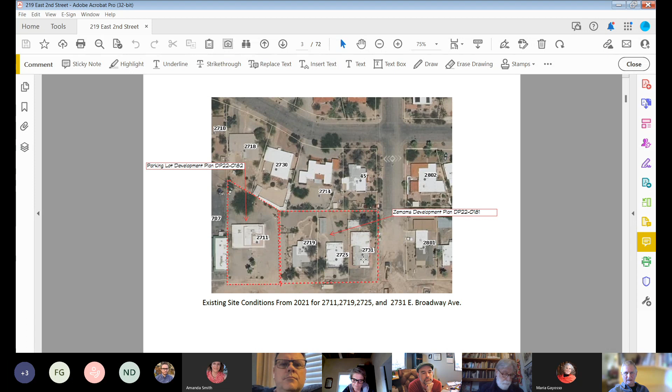We're well along beyond where this photograph represents. So the existing buildings on the property - excuse my scrolling if I zoom back and forth - this is the existing restaurant.

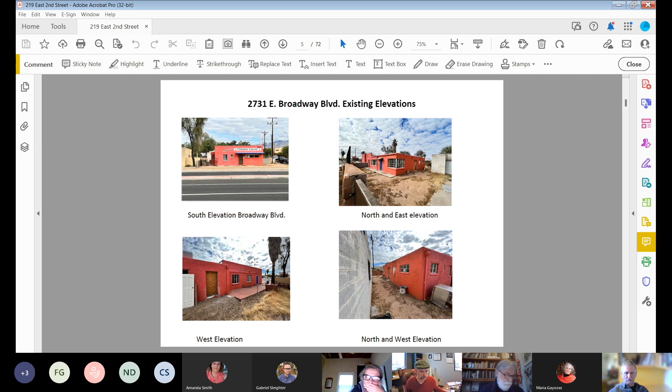Faven could talk to this if we need to, but the restaurant's been closed down for over a year, waiting for the improvements and going through the review process. These are the three elevations of the property as they were when I took the photos. This is one outbuilding in the back that is also being incorporated into the design as a covered outdoor eating space.

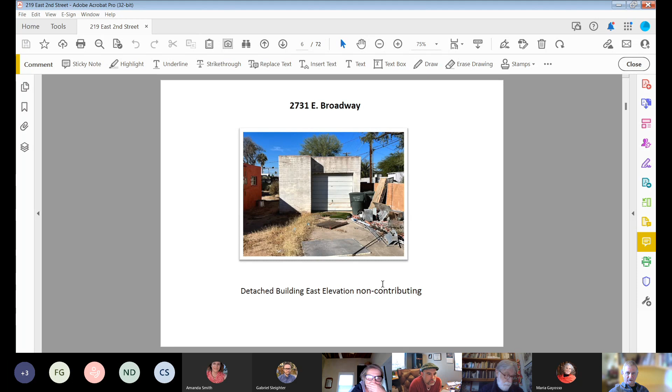This is 2725, which is next door, formerly an insurance company, and this again gives the three elevations of the building.

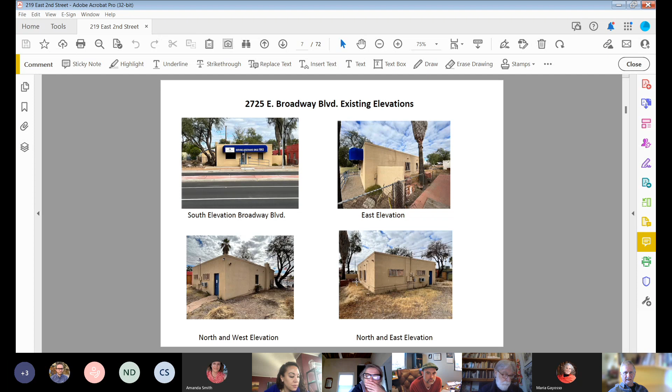This is another outbuilding that will be coming down in the back, and we're just waiting for approval on that with the development plan. The third property will be the tenant improvement property.

This has been a number of businesses over the years, and the plan in this initial phase - you can see on the back portion of the property there are some unpermitted additions that will be coming off, pretty much just cleaning that up and getting it ready for a new tenant. The Gebamarians have a couple of possible clients lined up for that.

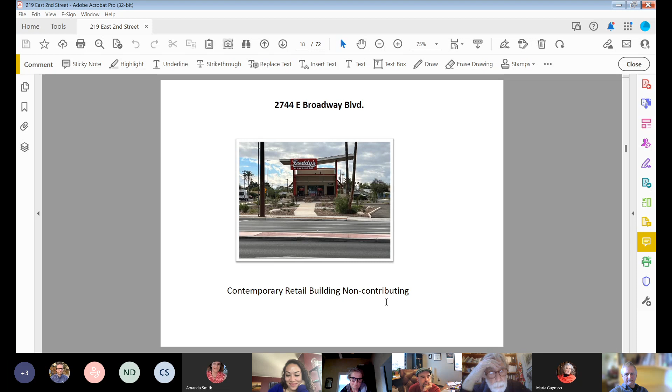Across the street is Freddy's Steak Burgers, which I haven't eaten at yet. That's one of the development properties that just went in, and adjacent to that is another contemporary office building, built in the 90s or 2000s. So that's the contextual background on where the building is.

We went through the development plan project scope. I've already discussed a bit about what we're looking at doing, but essentially the project amounts to 2731 being Zemams restaurant, with an expansion and improvements to the kitchen.

We have a plan and we're in our third and final round of review on the building permit. This is the number on that, and it has actually been approved for 2731. We're just waiting on approval for the development plan on that.

We have the two properties, 2725 and 2719, that are going to be developed as I described before. 2725 is what's going to be linked to the restaurant. They'll be really supporting each other in a lot of ways.

The restaurant will prepare food, and there's a connection you can see in the plan that will link the two, so it will be run as separate businesses, but their functioning will really be tied together significantly.

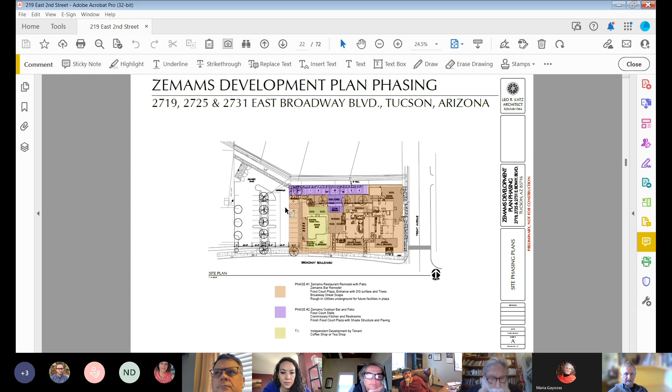And then you can see, and it's not in this drawing, it's in the previous drawing - there's the parking lot with trash collection, and in this you can see that this would be the drop-off area, and this is the court that we're creating that will give access into the buildings, and then later will be directly linked to the food service areas.

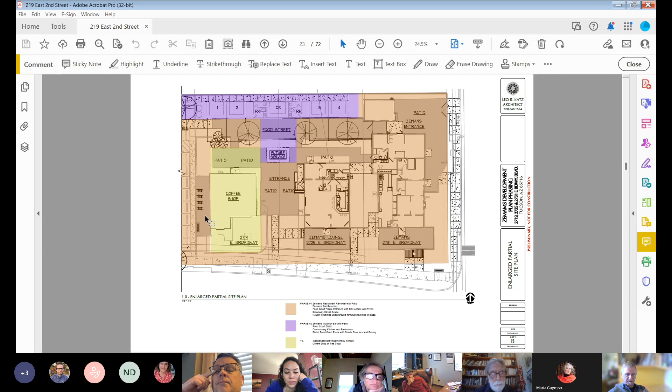Bicycle parking is going to be provided along the parking lot, and those are like our last set of comments were specifically about our parking. This is a little bit different than the final solution that we came up with.

Civil engineering came in and was able to really do a lot of on-site water retention, and I think it's just going to be a great environment for people to come and visit.

These are properties located to the north, and those are the residential properties. You can just see the outline here - it comes out more in the other site plans - but this is the easement that we have with the mitigating sound and light wall to prevent the transmission of sound to the north.

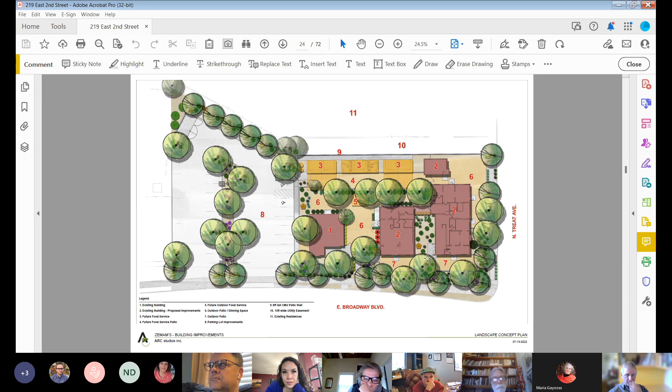These are the elevations that were presented. I have another set that are more fully developed, but this is what was presented to the neighborhood for their review.

This was a very early concept of the idea of what we were going to try and create at the back of the property with the food stalls, the commissary kitchen, and then we're looking at an adjustable shade structure to enhance even the trees that have been incorporated in the design for providing shade.

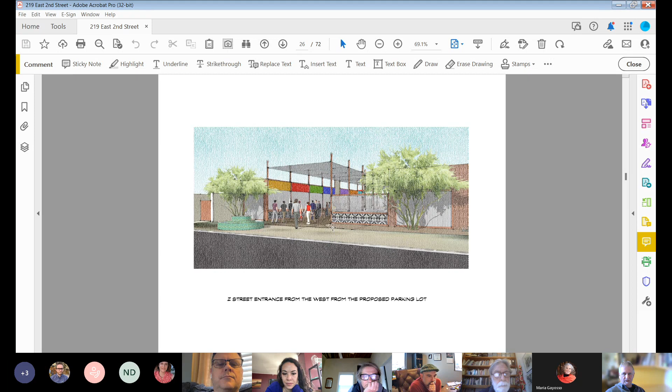So I wanted to share what we'd shown to the neighborhood association. I can go over this - it is available otherwise - but we had a very positive presentation to the neighborhood.

I'm a Sam Hughes, longtime Sam Hughes resident, and patron of the restaurant, so this was a great opportunity for me to be there. I think our investment in the neighborhood was a real strength in our team - having people who cared about the neighborhood, lived in the neighborhood, and being part of the development team. I think that was really important.

Again, this will just go through what we presented to them. I don't know how much detail I'll go into it, but it's sort of reiterating what I've already explained to you all.

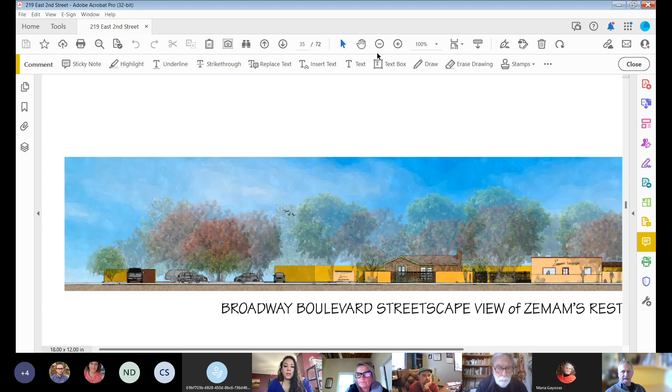So these are the streetscape renderings that we developed, and I'll show you those. The top one is simply a front elevation on Broadway looking north at the Zemam's here on the right hand side. This will be the lounge, the future coffee shop, and then you can see the parking lot here. The car represents where Treat Avenue is.

The canopies for the trees are relatively accurate. We really tried to tone it down a little bit so you could actually see the buildings in the rendering.

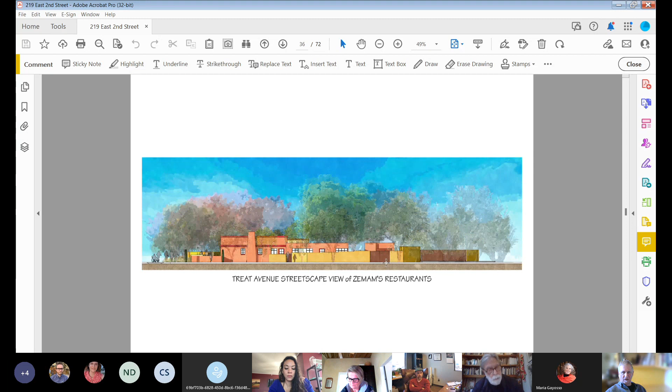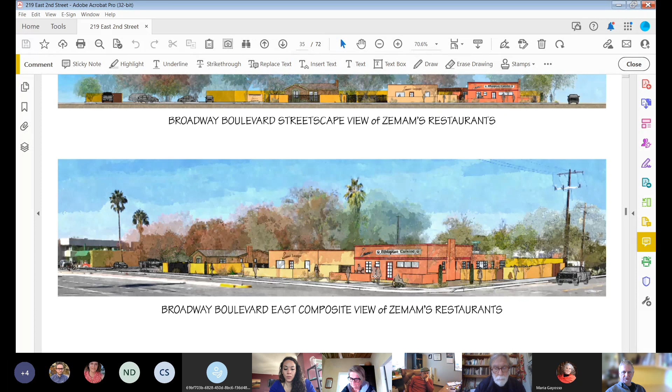And this really provided a second access and egress that we had to get for both buildings in order to meet code. So I think this is a great shot that represents what you'll see as you're going down Broadway.

The first one is a view from the Treat side looking in. This is the garage building that I showed photographs of. This is an existing wall that will be painted. These are steel gates that are in, and then you can see the front patio area as it goes out towards Broadway to the south.

And then these gates here represent the access that will be maintained for this easement that runs between the properties. Everything north of here is the residential area, so you can get a sense of scale of how things are separated from the Sam Hughes neighborhood to the new development.

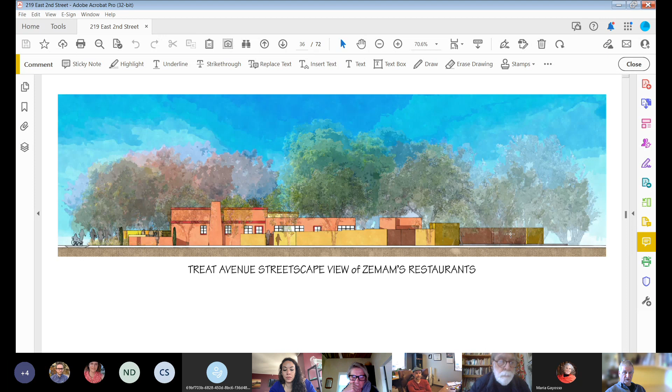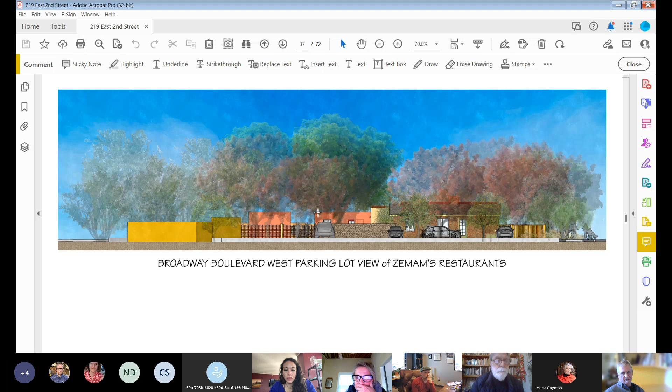This is an existing adobe wall that earlier we didn't know if it was salvageable, but we are going to save it. And then this is a new fencing that we're going to need to put up. All of this needs to be contained in order to meet liquor service requirements as far as a controlled access to it.

This wall represents the screen wall here that we're putting in, but this will get you an idea of what we're looking at from the west.

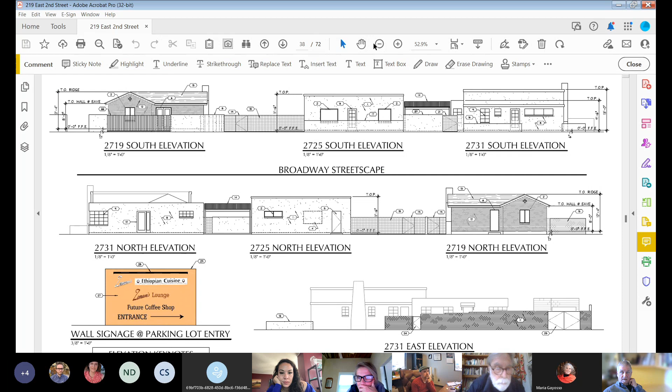These are the more developed elevations beyond what we presented to the neighborhood association, with walls and fences called out. It really gives you more of a graphic scale. We've scaled off the existing heights of buildings, and this is something we couldn't do in the rendering. So we wanted to present this to sort of address those specific issues.

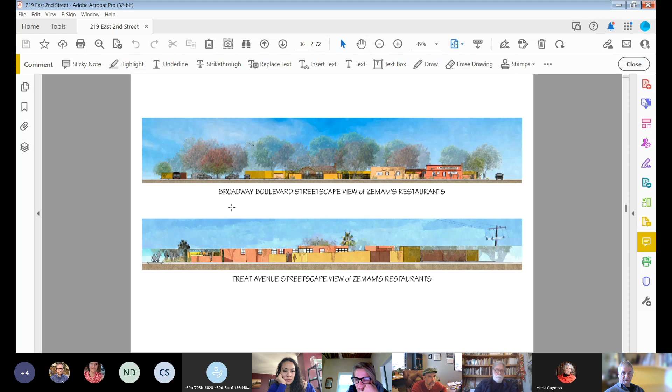The sign, this is the enlargement of the sign that will be placed in the parking lot. I think you can see it on this front elevation right here, so it will be in the parking lot, and you can see it.

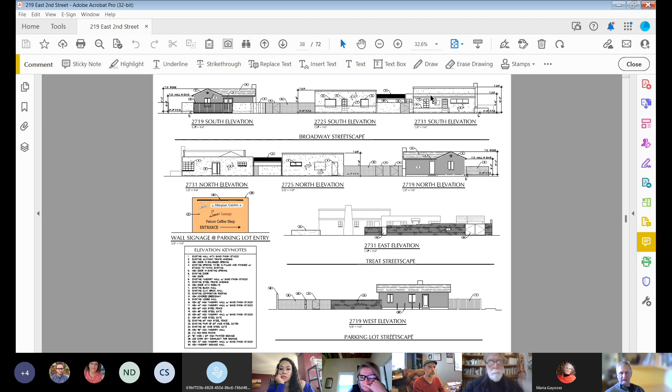We have another perspective of it, but it goes with the same stucco finish, with the graphics directly on the stucco that we're going to have on the signage for the two buildings up in front, for what will be the lounge, and for Zemam's, which already has the sign on it, so we're keeping in that spirit.

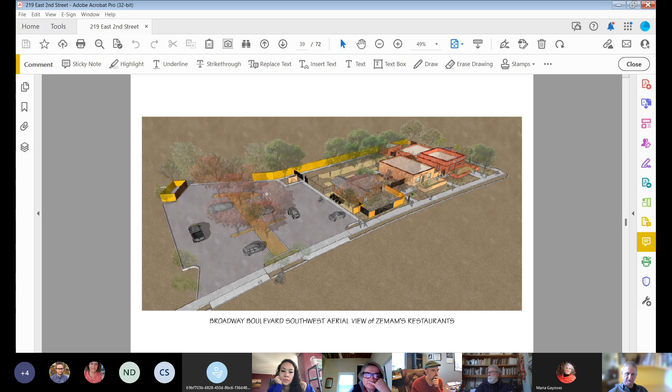This will be the sign to identify that this is the new entry, the desire to have the new walkway be the primary access to the property, which will feed into the new outdoor patios. And this is a view from the southeast that gives you the reverse, so you can get an idea of everything else.

This area in between the two buildings is really turned into much more of a utility space. Because of the age of the buildings, we had to pull a lot of the equipment that had previously been there, and the new equipment we needed to put outside. That will have a 6-foot masonry wall with a gate on it, so that will all be screened and contained from view.

From the streetscape and from all the clients and customers, because you can see there's patio space along this side, as well as patio space created here. Like I mentioned before, this will be a fence that you'll be able to visibly see the patrons in this patio. It's one of the enhancements that's far enough away from the road where people will enjoy themselves, but it also will show some human activity that's been long missing.

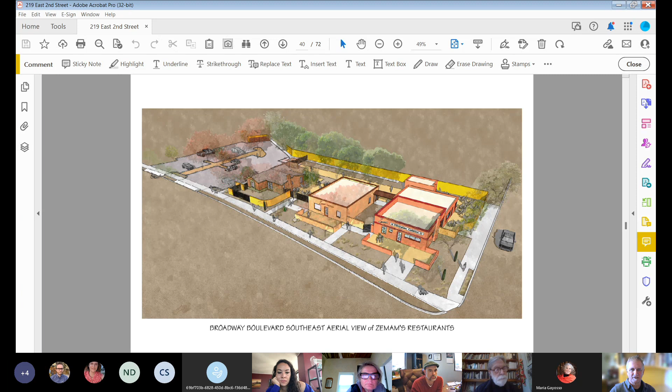I can go into this, and maybe Maria can speak to it, but what I did is outline the criteria that we used in the development plan. This speaks more to the work that Greg and Eric did in the civil and landscape work. We did address setbacks, parking issues, and all of the guidelines that pertain to landscaping, open space, and signage, which we consulted in achieving the final development plan.

This also is what we've been talking about: the landscape buffers, shade, streetscape design, and then we've gone through the historic review, which was part of what we needed to do.

These are the development plans, and we've gone through, we're now on our 3rd round, and it sounds like we'll have an additional round addressing the trash collection and agreement conditions, but I think it's really minimal.

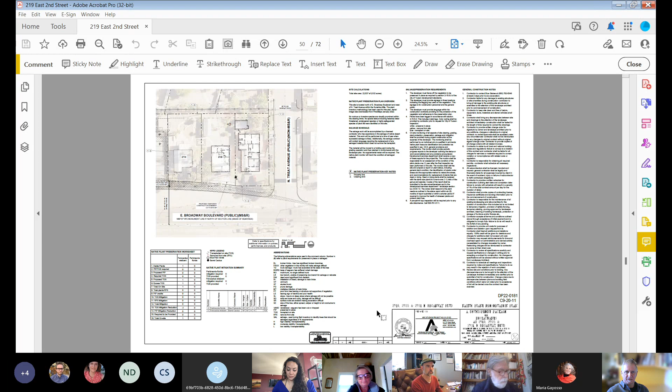This has gone through review and is available for review. I think the best document that illustrates what's going on, just to look at the final plan, is the overall plan here, which is defining landscape areas, hardscape areas, fencing, and access for both properties.

There's a whole drainage report that was part of what Greg prepared, regarding on-site containment of any water generated from the buildings and the site itself.

This is the breezeway that was part of the discussion. Treat Avenue is another great asset, as I described before, and I think people are really starting to use it because there's a controlled crossing at Treat and Broadway. So the idea that people can get to the site through the boulevard using their bikes is only enhanced through that development, which is really great.

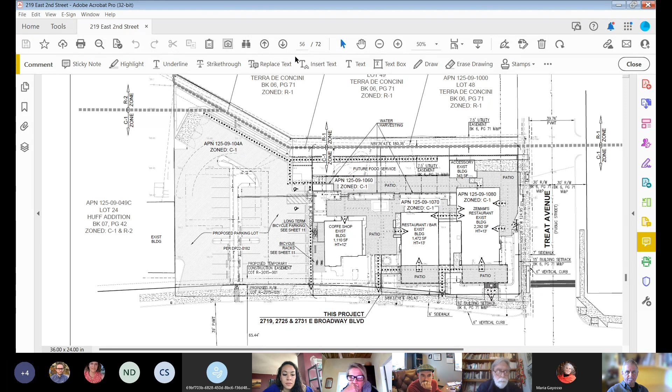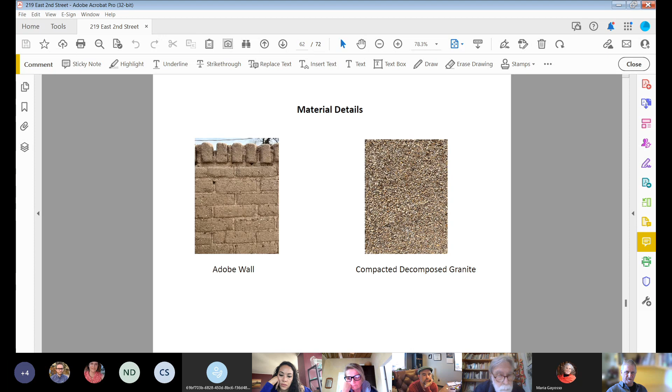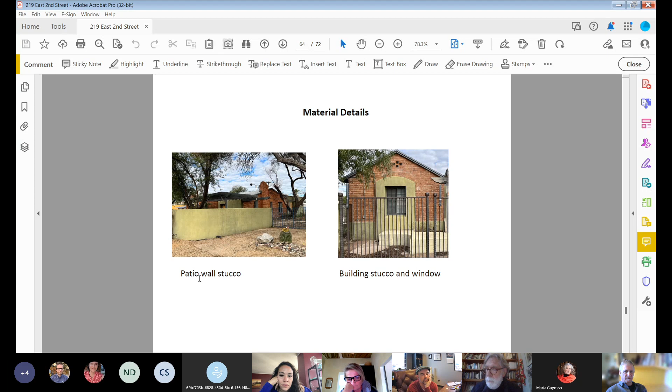And the last thing I included, just for a reference point, would be the letter that Corky prepared in the review of the project. So that is it, I believe.

Let me just reduce this, see if I can get it down. Thank you. Before we transition, I'm hearing an echo.

Leo, would you mind muting yourself for just a moment? Muting myself? Yes, just for a moment.

We're going to transfer over to Corky Poster to give a review of his design professional review, and then we'll open it up to the DRB members and the members from the Sam Hughes neighborhood to ask any questions and share their thoughts, at which point I'll mute myself and the echoing will no longer be a problem.